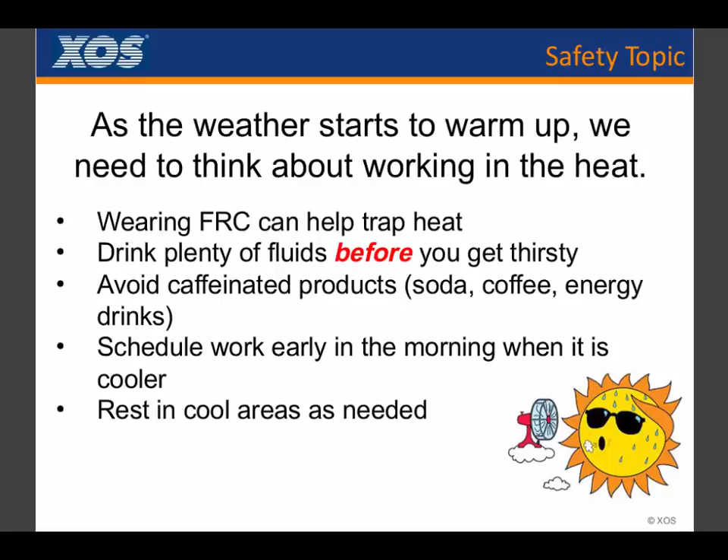You can, if you can, adjust your work schedule. It is definitely going to be cooler in the mornings, so if you can do outdoor work early in the mornings, it's best to schedule it that way. And then during the heat of the day, see if you can work indoors. If you're out working in the heat, take rest breaks and schedule your breaks. Typically, depending on the weather, 15 minutes in a cool place every hour is kind of a standard. You definitely want to stay safe and stay healthy when you're working in the refineries.

So now we'll kind of get to the meat of the topic. What is the job of the refinery to maximize production of? There's a lot of products that are being put out: gasoline, diesel, jet, asphalt.

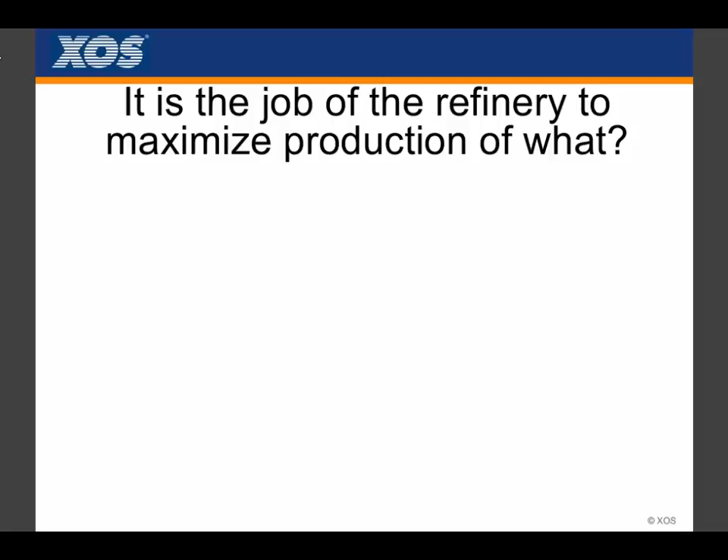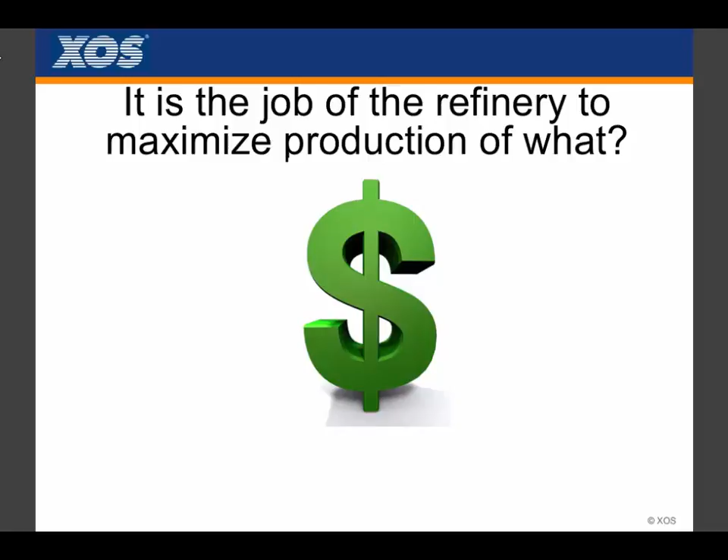Really, it's money. The refinery is going to operate in a way that would produce them the most money. That could be gasoline, pushing more production towards gasoline. As margins increase on diesel, you're going to start pushing towards diesel production. That was a trick question, of course. You definitely don't have a specific product in mind.

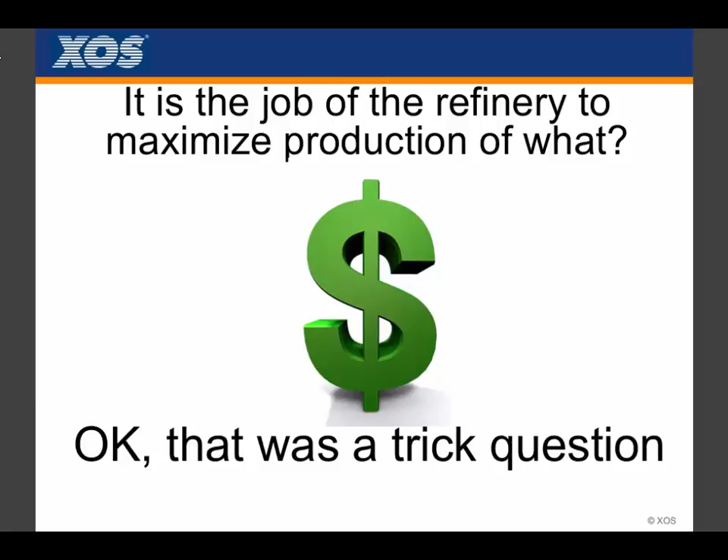One of the biggest costs that a refinery incurs is the crude, your feedstocks. Since that's going to be the largest cost that the refinery is going to spend, you want to maximize, buy cheaper crudes if you can run them.

We're seeing, obviously, now a wide variety of crude slates that are available. Crudes that are available from Canada, obviously, has become a very big producer and supplier for the U.S. market. Also, within the U.S., the light tight oils that are being produced. All these crudes have varying pluses and minuses, if you will. Some may be lighter and sweeter, some may be heavier and sour. Some may contain various contaminants that can cause problems throughout the refinery.

So what happens is the crude buyer is going to be looking for the most opportune crude that can be run in a specific refinery, and oftentimes the refiners are left with trying to figure out how they're going to run it.

Your opportunity crudes do represent a slight advantage in terms of cost. Some of the heavier crudes or sour crudes may be 5, 10, 15% less. When you've got $100 per barrel crude in the market, a 10% advantage is quite a bit. But when you've got $35 crude, now that advantage has shrunk. You've taken a $10 advantage per barrel down to a $3.50 advantage, which may or may not be worth it to try to run these more difficult crudes.

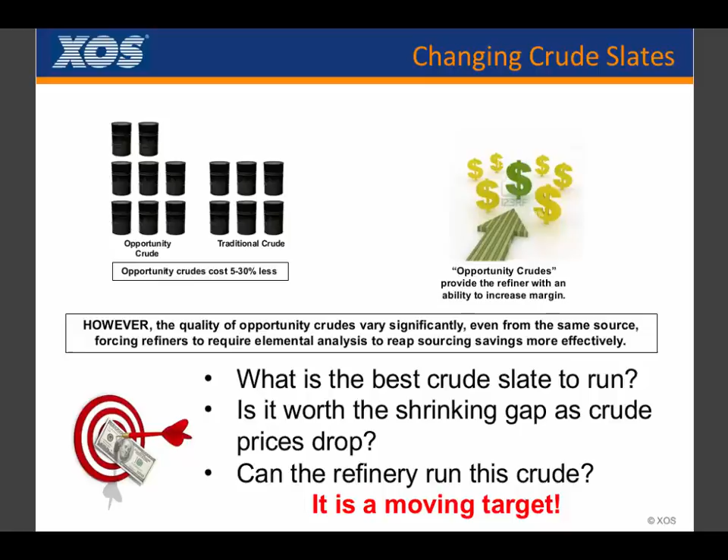Just as an illustration, this is information from the EIA website on crude quality. This is from 1985 to 2015, with the gravity and the sulfur content of the crudes that are being run throughout the U.S. One of the things we see is a trend of sulfur increasing. And obviously, with technology, we are getting better at desulfurization, so there's more of an advantage to running those high sulfur crudes. On the flip side, you've got the gravity here, and that is just how light or heavy that crude is. Crude is getting heavier.

And again, heavier crude is typically going to be cheaper. The equipment in the refinery has been developed to make that more cost effective. Now, one thing of note and interest is right here in 2014, you'll see a jump in the gravity of the crude and kind of a leveling and a little bit of a lowering of the sulfur content.

Reason being the introduction of the light tight oils, the shales produced domestically. The Bakkens and the Eaglefords are typically very light crude, and they're typically very sweet, very low sulfur content. They do present their own share of problems in terms of how it's going to be treated, and therefore they're cost effective, but they do pose new problems. As these new crudes are being introduced into the refineries, they must be treated accordingly.

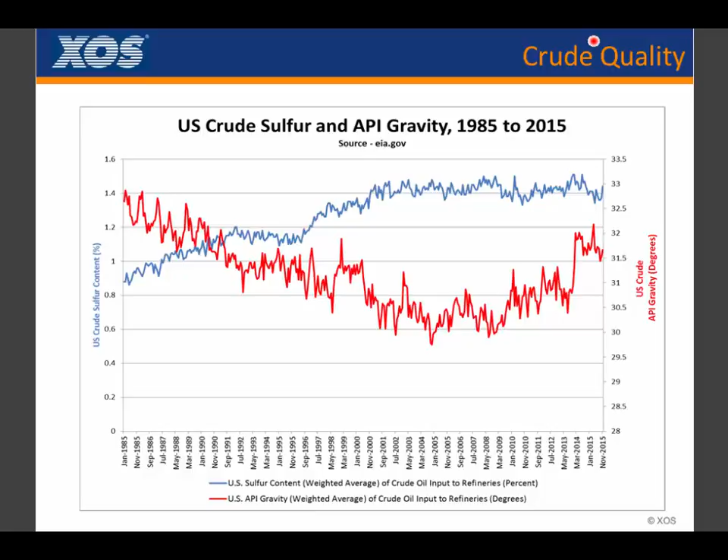Tier 3 standards. The EPA has set specific sulfur limits to be attained by all manufacturers of gasoline. So in 2004, the sulfur limit was 120 ppm. Tier 2 went into effect in 2006, and that dropped sulfur levels down to 30 ppm. What's happening January 1st is the sulfur levels in gasoline will be dropping down to 10 ppm. There are specific standards in terms of smaller refineries being able to go until 2020 before they must comply, but at 2020, all refining will be at the Tier 3 standards of 10 ppm.

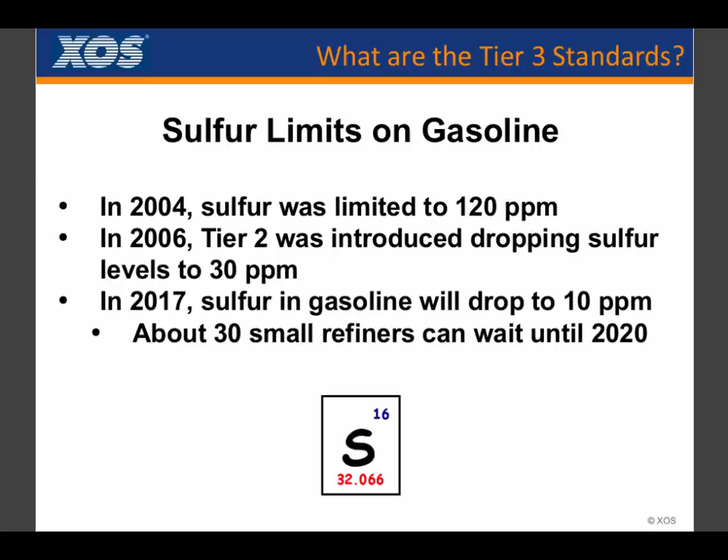Why is this being done? When the gasoline is burned with the sulfur content, you're generating SO2, SO3 that are going out into the atmosphere. Two things are happening. One is acid rain. Some of us that are a little bit older have heard about acid rain for years and years. That's from the sulfur, the SO2 reacting with moisture, with water in the air, forming sulfuric acid. So by lowering the sulfur level in the gasoline, you're obviously controlling the formation of acid rain.

But more importantly, there's a lot of health implications. SO2 is a trigger for asthma, a trigger for breathing and respiratory issues. The EPA has put a number where they're saying between $6.7 and $19 billion per year will be saved in health benefits, in the form of reduced deaths, reduced hospital visits, reduced respiratory infections, and the big one: 1.4 million lost school days and work days that will be saved.

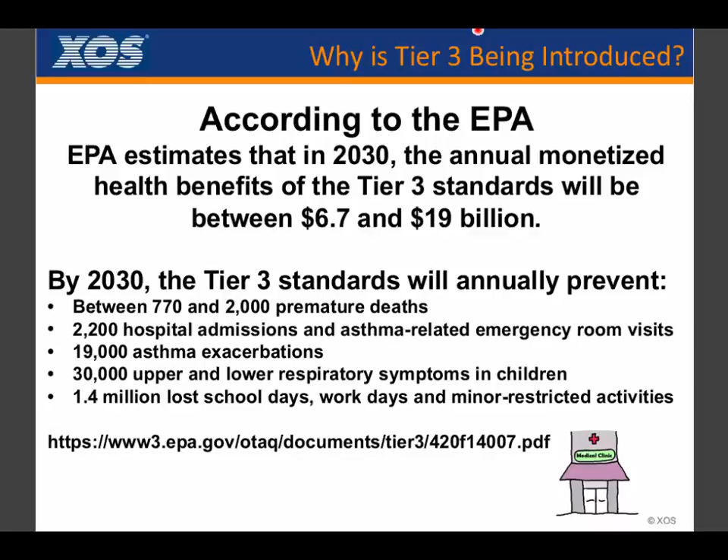So just like we've talked about, you've got sulfur in the crude. This crude is cheaper, but the problem is now you're going to have to remove that sulfur. The method on which you're going to do that is desulfurization, typically in hydrotreating capacities.

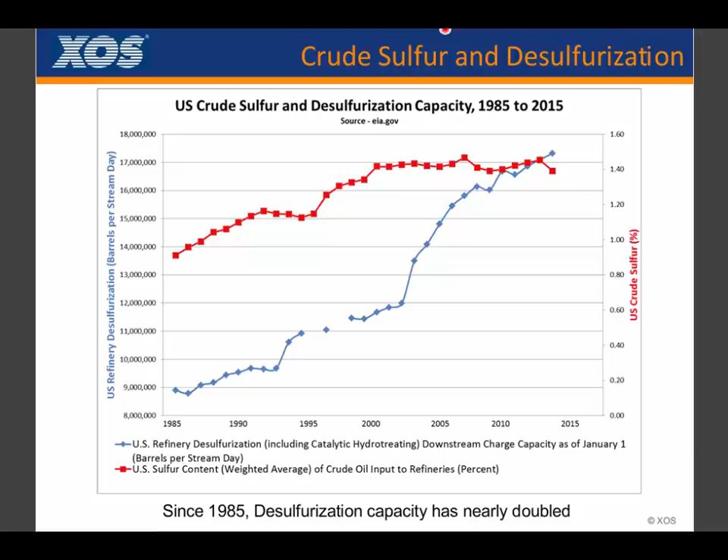So you can see, once again, this is the sulfur content that has been rising over the years. Here's your hydrotreating capacity, and from 1985 to present day, your desulfurization capacity has nearly doubled. You can see again, ramping up for the Tier 2 standards that kicked in 2006, a big jump in the hydrodesulfurization capacity. So this is something, obviously, the market is preparing for, but this is something that does come at a cost.

Refineries will spend millions of dollars per year for desulfurization, and you've got hydrotreaters throughout refineries. You can see on the streams coming off of your crude unit: your light naphtha, your heavy naphtha, your diesel cut, your feed going to the cat cracker, and then the FCC gasoline out of the cat cracker. You're going to be doing a lot of desulfurization through the process.

Desulfurization costs a lot of money. Hydrotreaters cost a lot of money in the form of capital and then operating costs. The method of running a hydrotreater is you take your stream to be hydrotreated, desulfurized, mix it with hydrogen, heat it up, and then run it over a catalyst bed, which is an exothermic reaction, so now you're creating even more heat, which then needs to be cooled.

The sulfur in your hydrocarbon stream will react with the hydrogen and will form H2S gas. The H2S gas leaves the liquid hydrocarbon with the hydrogen. So you've got H2S in that hydrogen stream that then goes off for further treatment. You've got amine treaters local to the hydrotreater unit, but then you've got an amine unit typically within the sulfur unit, the sulfur recovery unit. So there is a lot of money, a lot of energy, a lot of hydrogen, and a lot of catalyst that is being spent to remove this sulfur.

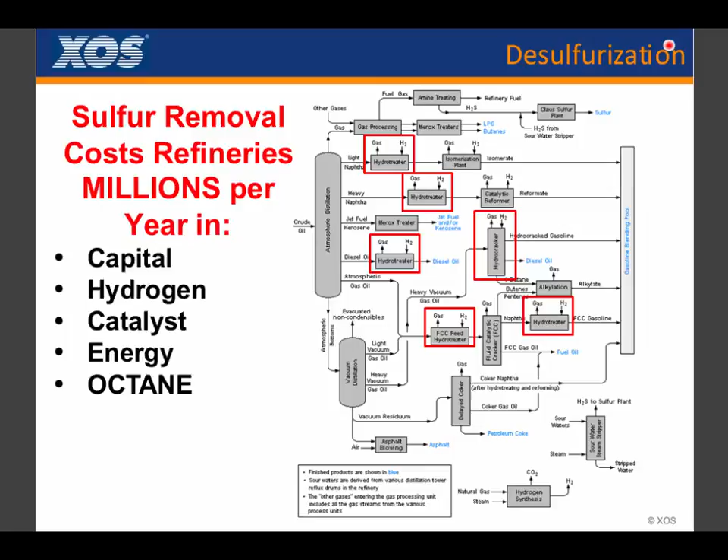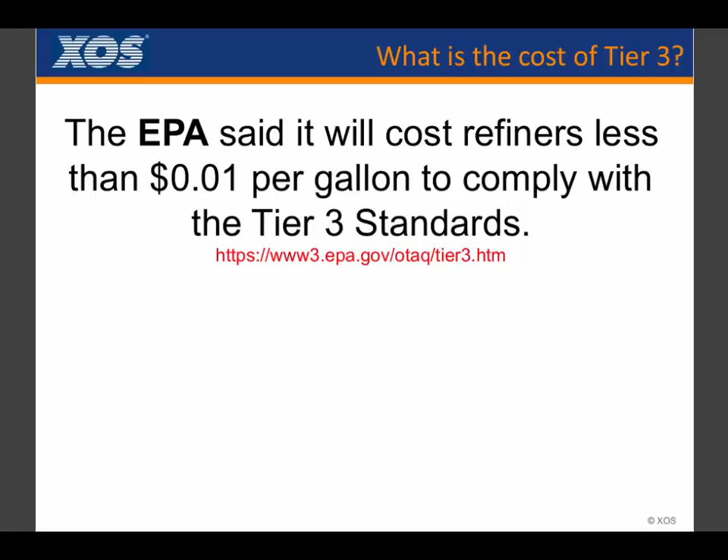What the EPA is saying is it will cost less than a penny per gallon to comply with these standards. This was a number put out in 2014. I think industry disagrees with that - I've seen anywhere from 6 to 9 cents per gallon that it will cost. I think the truth is going to lie somewhere in the middle.

The big thing we're looking at is money, but there's also an increase in greenhouse gas emissions. The reason being is hydrogen has to be generated at the refinery. You're taking natural gas, methane, mixing it with steam, heating it up through the hydrogen unit, and generating your pure hydrogen, but you're also ending up with carbon dioxide, a greenhouse gas, as a byproduct. So the more you have to hydrotreat, the more hydrogen you're generating, the more greenhouse gases you're generating. Again, optimization is always going to be critical.

Another impact is the EII, your energy intensity index. Every refinery is benchmarked and gauged on how energy efficient they are. So if you can maximize efficiency, you're going to have a positive impact on your EII.

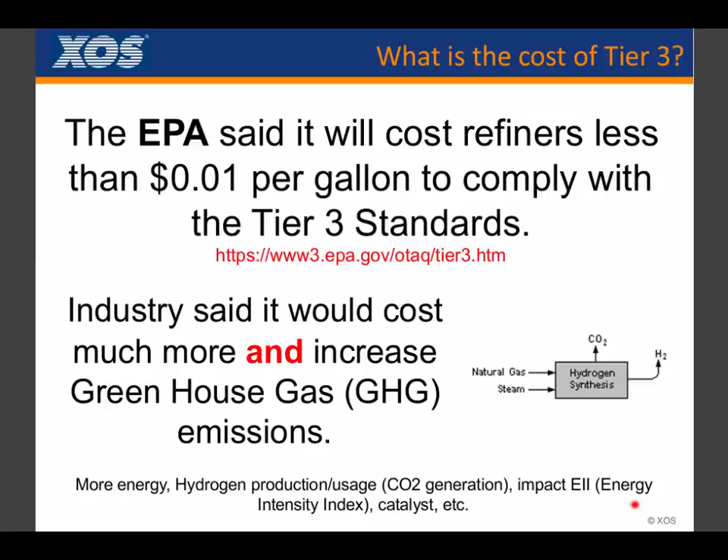From a catalyst standpoint, it's very expensive, but even bigger is it has a finite life. You have to take that reactor down, that unit down, shut everything down, clear it, and replace all of the catalyst, which gives you a downtime of 2 to 4 weeks before you're producing product again. That catalyst has a very finite life, and catalyst does not die, it's murdered. So how you run that unit - if you're running it a bit harder than you should to comply or to try to get lower sulfur levels, you will need to replace the catalyst on a more frequent basis.

Loss of octane - I mentioned it earlier, but a lot of the streams blended into your gasoline are already hydrotreated, low in sulfur, but you'll see that going to the cat cracker, your fluid catalytic cracker - that's where a lot of your gasoline components are generated, and it's a very high octane component. So it's critical that the cat cracker is running properly, and it's critical that you're not removing the octane. What happens is at the tail end, if you're doing post-treatment of your cat feed or cat gasoline to remove sulfur, you're also converting olefins. Olefin is octane. So that octane number being lost, if you're over-treating or over-removing sulfur, you're also removing octane. It's a huge cost to the refinery.

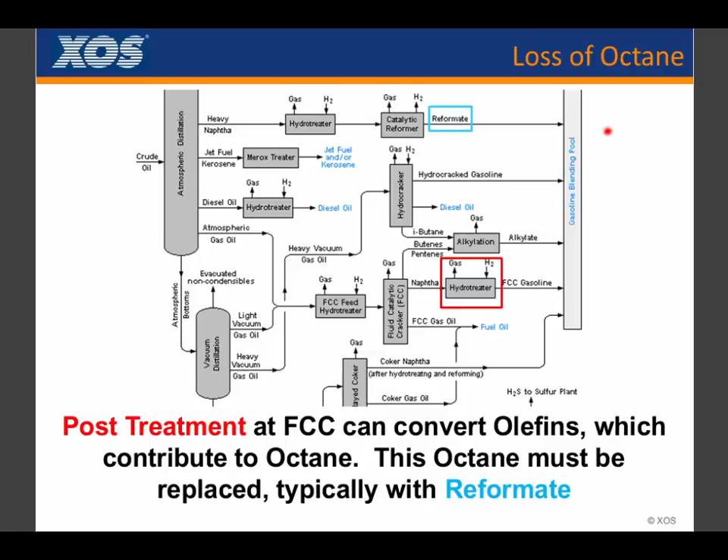You really want to make sure you're monitoring and optimizing that area because you will have to make up with reformate, which is from the reformer. If you're shifting more production to the reformer, that's going to be more expensive. So really, you need to make sure that you're optimized.

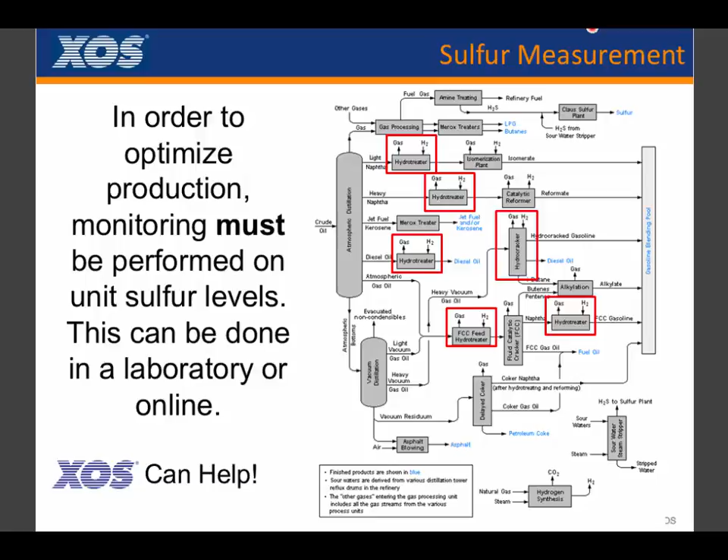I think here's really where we tie in - the refineries need to comply with this. The best way to make sure you're running efficiently and maximizing profits and dollars, which is what the refinery's job is to do, is to monitor. And that's really where XOS can help - this is where we've excelled in the industry. We've got benchtop analyzers and online analyzers that can give you the feedback you need to operate properly and make the most amount of money, the most profits.

To get into the technology, we'll start with just an X-ray fluorescence, a very general overview. It's a technology that's been used for many years in the petroleum industry. It's understood, very reliable and predictable. It's an easy test - there's no combustion, and little to no sample prep. So it's a test method that has been very successful in the past.

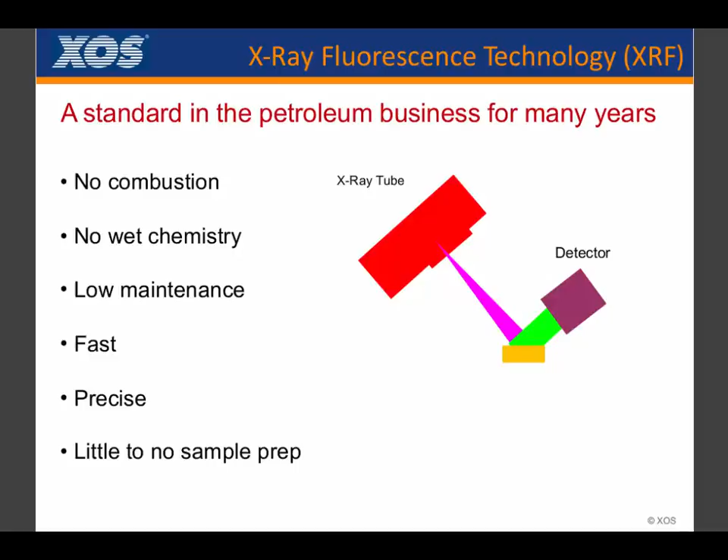Here is just a typical energy dispersive XRF, kind of a basic XRF. You've got an X-ray that's being generated here, generated in a polychromatic beam. What that means is you've got your energy at which the characteristic energy that you really want, but then there's also going to be a lot of background. So that background is going to limit your levels of detection.

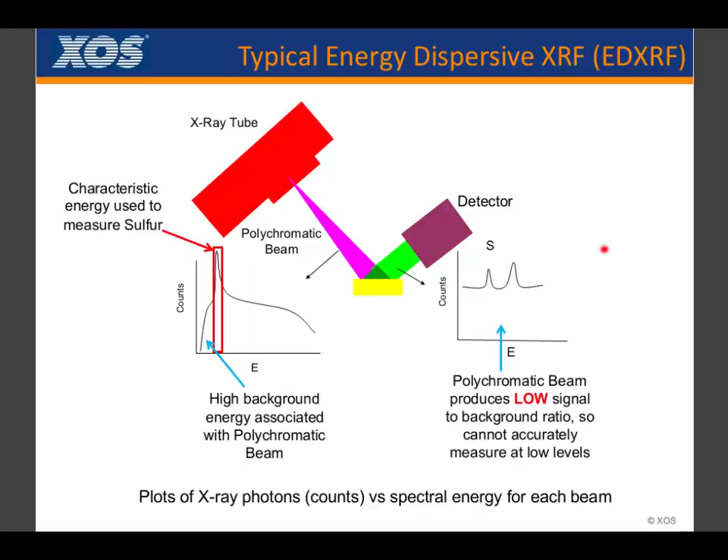With that polychromatic beam, you're focusing it on your sample, and what happens within the sample is you've got your electron - it gets bumped out of the inner shell of the element you're measuring. Once that electron leaves, you've got an electron in a higher energy state that drops down into the inner shell. When that happens, it fluoresces, gives off energy. That energy is at a specific wavelength that a detector can monitor. So you've got your fluorescence being generated over to your detector. And what you'll see is, again, you've got a lot of background here. When you get your peaks, they're not going to be very much higher than your background. So as a result, your LODs are not going to be very low.

Wavelength dispersive, so your WDXRF, is a bit more advanced. Same principle in that you've got your X-ray that's being generated in a polychromatic beam hitting your sample, and again, there's not a lot of difference here. You've got a lot of background energy that is going to interfere with your results. Fluorescence can be filtered, and that will remove some of the background, and it'll be able to lower your LOD.

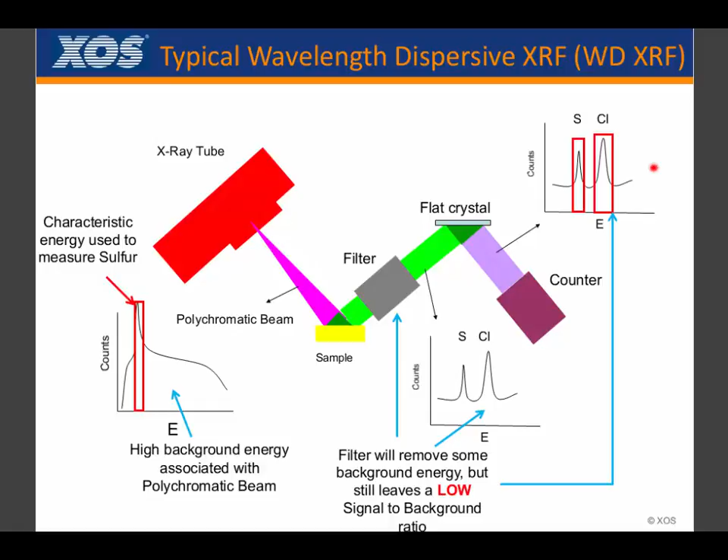That then is bounced off of a flat crystal, and then your sulfur and chlorine, your elements, are measured at the detector. Again, you're lowering the background, so that gives you some lower LODs, but there is obviously room to improve. This is XOS's technology. The company was really formed based on the doubly curved crystal, the optics. The optics are really where XOS started, and that's what gives the advantage and the low LODs that are required for these Tier 3 standards.

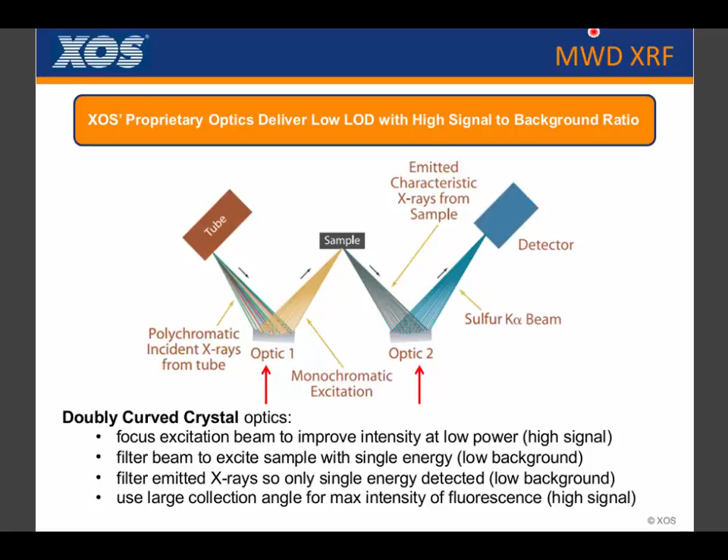This is just kind of an overview of what the system looks like, and in a little bit better detail, a graph of what you're seeing. To start, again, you've got your polychromatic X-ray. When it hits that first optic, that doubly curved crystal, you are monochromating your energy. So you get a very precise energy as opposed to here where you've got a lot of background. With that precise energy, you get a very clean result for fluorescence, send that over to your second optic, which then is able to filter out and give you a very precise measurement of the element you're looking for, sulfur in this case, with very low background.

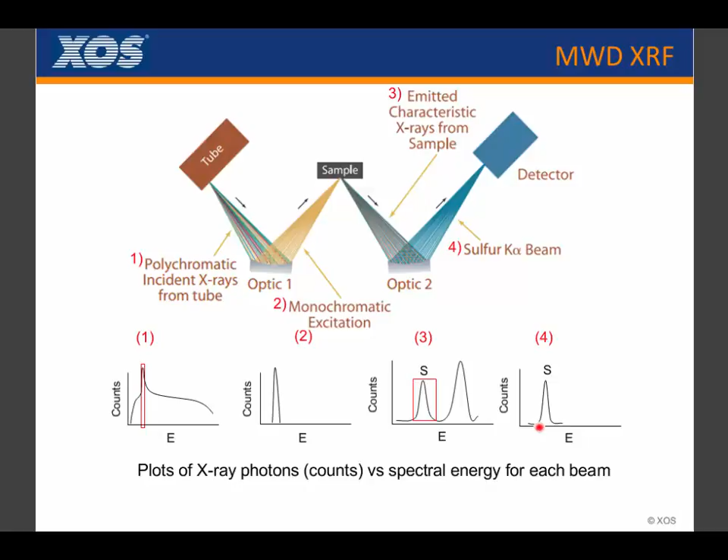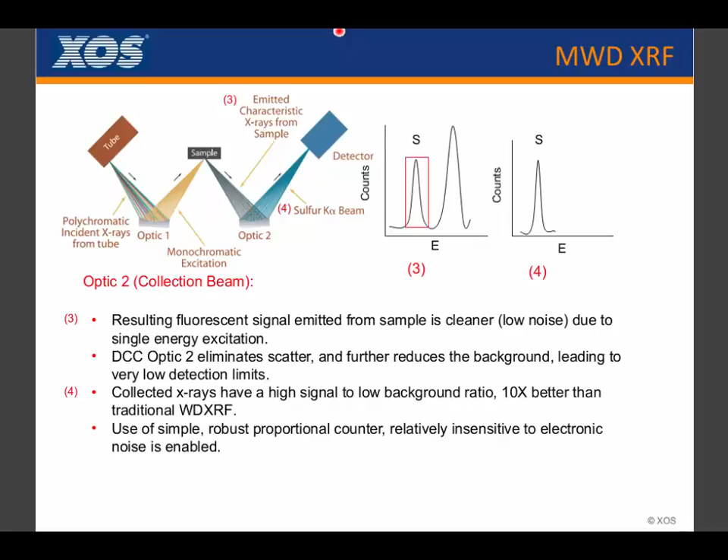This is really a great explanation of how this is being done. Again, with the monochromating of the X-ray, we're able to run at lower energy levels, which is going to prolong life of the tubes and improve safety and reliability. On the collection side, we're able to get a very clean result with very little background. We're looking at 10 times better than traditional WDXRF. With the simple design and simple operation, it's a very favorable analyzer for use.

Now, we've got some performance data here. We've done a lot of work with ASTM. There is the reproducibility, which is the big R, and repeatability, which is little r, that are typically looked at. Reproducibility is where you've got two labs, two results from two different operators doing the same method. How close are the results? That's a good measurement of the simplicity of a test and making sure that everybody can do the same test the same way, so keeping it simple is very important. You've also got repeatability, which is doing this sample over and over again. What kind of numbers are we looking at?

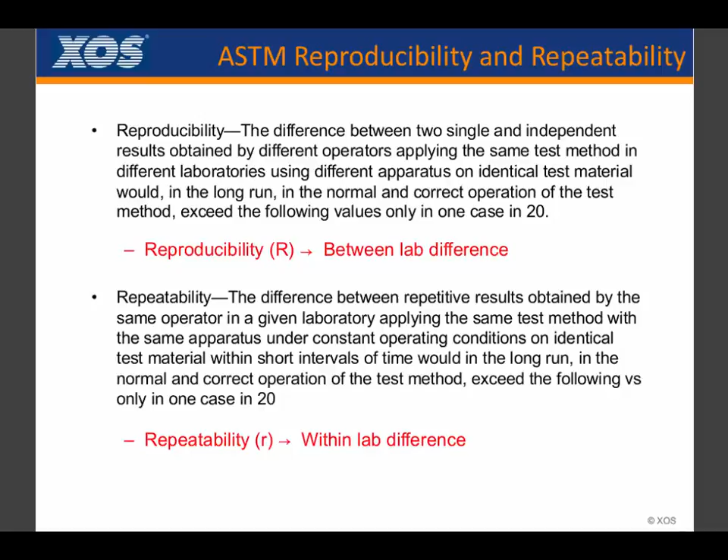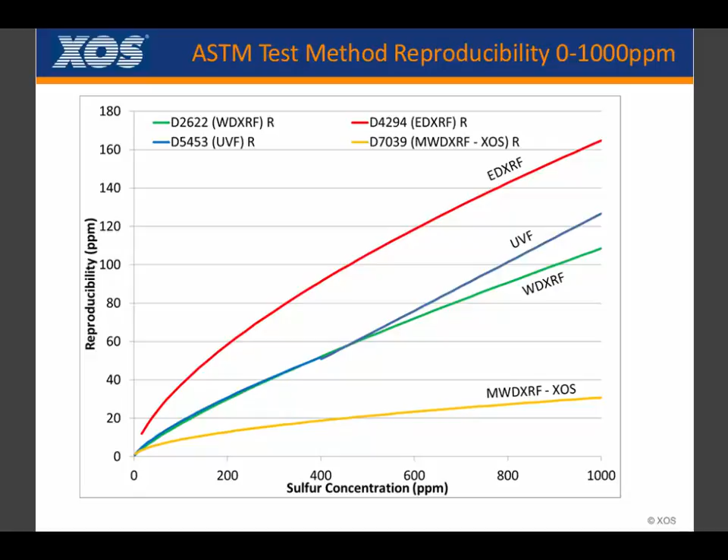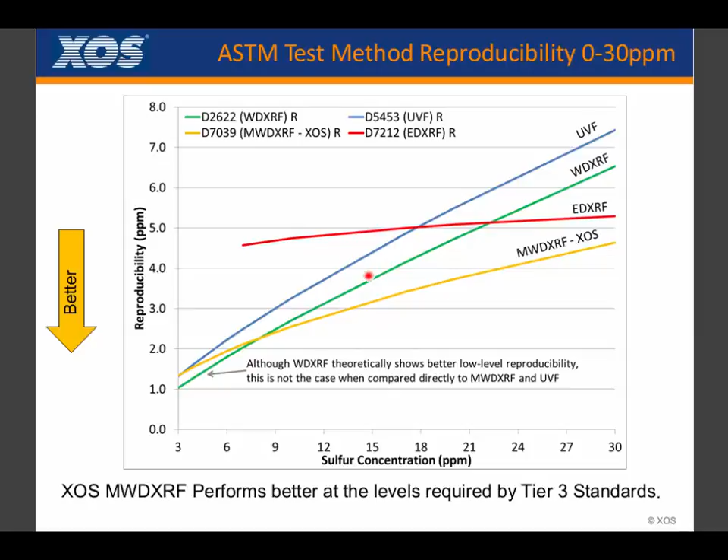The 7039 is the test method that all of our Sindie analyzers use, including our onlines. 2622 is the standard for measurement within the industry. 7039 is also used. We do have analyzers that measure both. And then you've also got 5453, which is UVF. So through these different test methods, you can see that the MWDXRF, the XOS Sindie, does perform better than traditional 2622 and UVF.

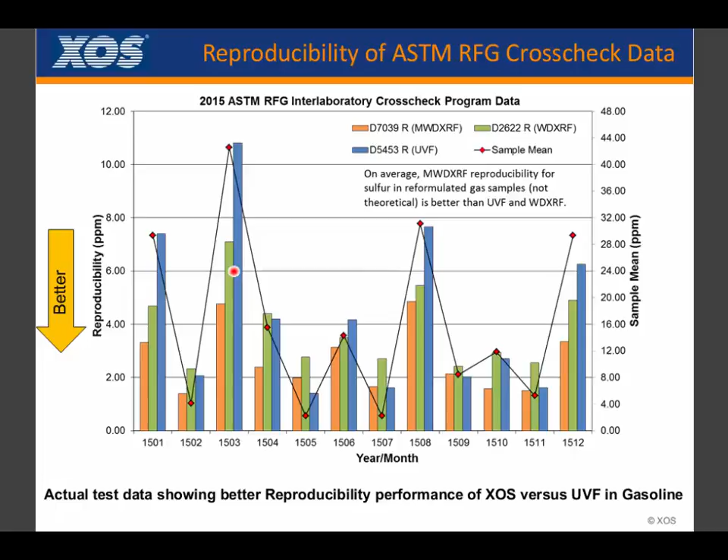With these benchtops, it's all a very precise, very quick test method. It is 5-minute tests. Results are very consistent and very clear, very low LOD. You've got an LOD of 0.15 when you're trying to measure it in the 10 ppm range, well within our wheelhouse for proper measurement.

We also do have auto samplers as well, if that's something that you'd want to test. We do have the Sindie OTG. It's OTG, it's on the go. It's a smaller design. This is something that is used within mobile labs, or if there's ever a need where you have to go out onto a site and just do the test right there. It is beneficial for these mobile environments.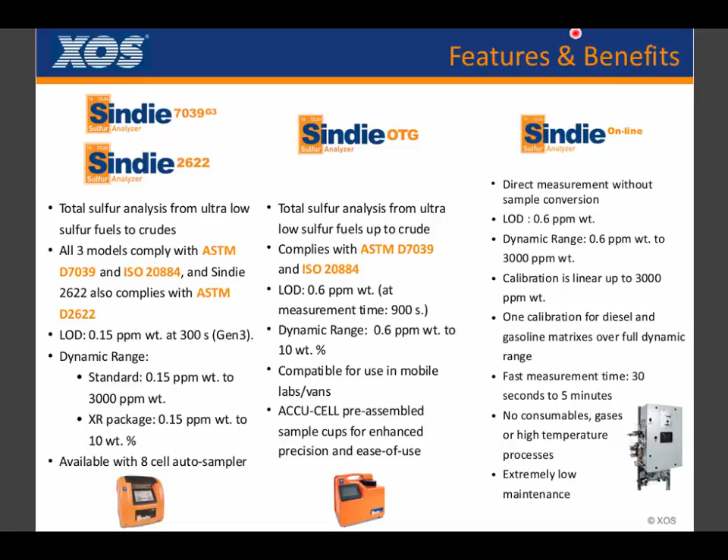So jet has a higher sulfur content. If you've got a transmix going from diesel to jet, even though the densities are very similar, the sulfur contents are going to be very different. So online sulfur measurement is very good for trying to minimize your transmix. There's no consumable gases, and it's very, very low maintenance. That is really one of our big advantages, how little maintenance is required.

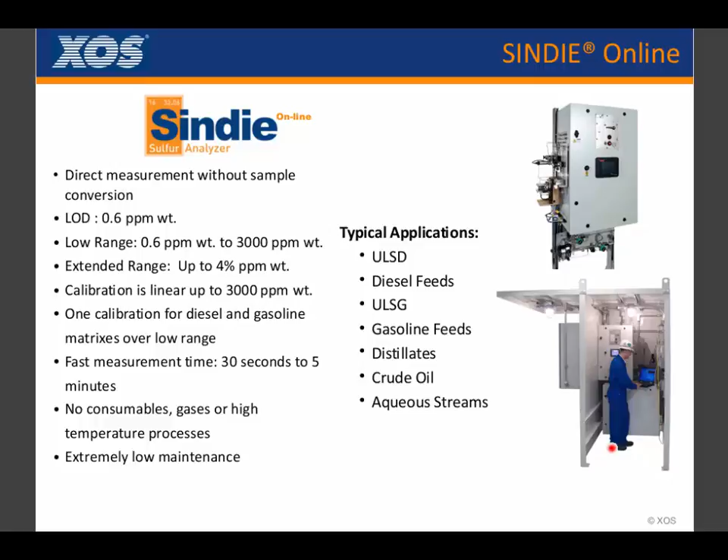For the online, here's a little bit more information. You can see that the kit is very small. It's very compact. It can be mounted in an enclosed shelter environment. Very, very safe. And really, because you've got a flowing sample, this is really the critical portion of how the measurement is done.

The sample is constantly flowing through the window module. It is constantly being exposed to the X-rays, so you're always getting readings. Over that 5-minute period of that flowing sample, you're able to get a very accurate number of what your sulfur content is. The big advantage is we also can send a signal every 15 to 30 seconds. So instead of waiting the full 5 minutes, you also have a secondary reading where you're able to catch any rapid changes.